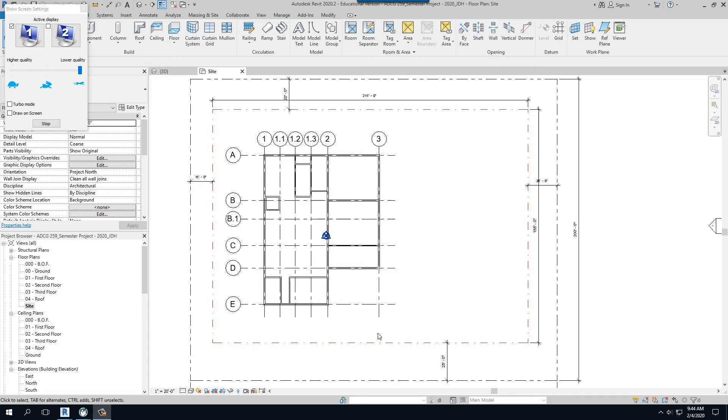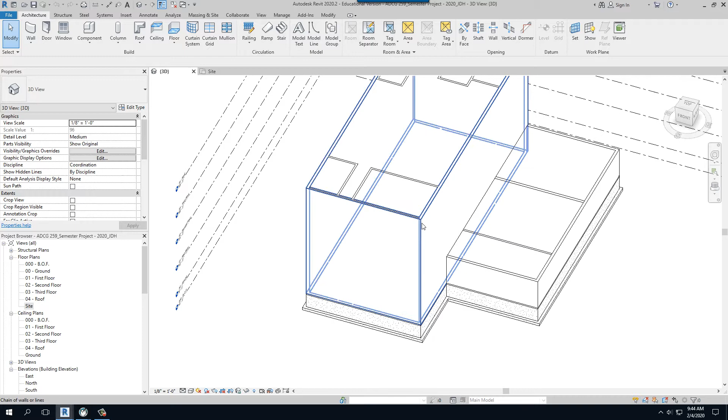Okay, so today in class we talked about masonry, and surprise, surprise, the building that we have is going to be a CMU building for the most part. Now you can see we have a lower area, we have a higher area, and what we're going to do with all of our exterior walls, we're going to change them into something that resembles our masonry units.

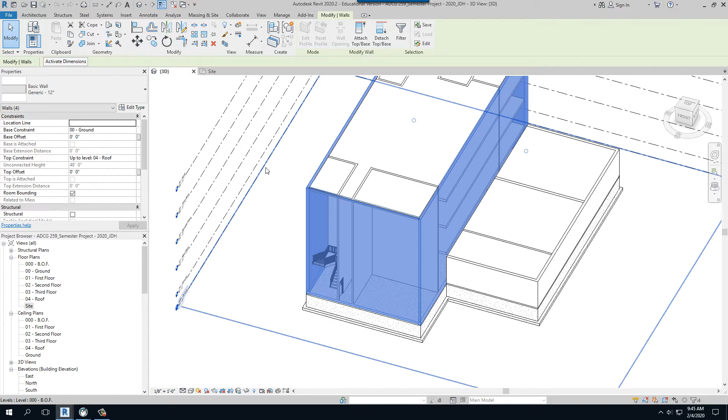Right now, though, these are just a generic 12-inch wall, where there's a lot that's going to change about this as we go forward, because it's not going to be a plain old block wall type of CMU like we saw. We're probably going to use more of a decorative or burnished, or perhaps in some areas a glazed unit as well. But we have to build these walls, and what we have to do is build a wall that will work. Okay, so how are we going to do that?

Let's just go to the first floor and not use our ceiling plans. So let's go here and let's just click on a wall. And once we click on it, when we go to edit type, what we can do now is either duplicate this wall, or we could turn this wall into one of the existing masonry walls that are out there, like brick on CMU or brick on metal stud.

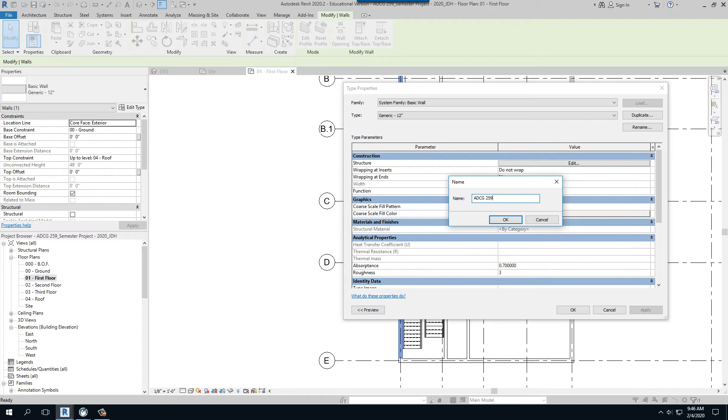However, that would be too easy. And none of these really match what we're going to do, okay? So what we're going to do is build our own. However, you can always piggyback from other walls too if you like, but I want you to get the experience of building it. So we're going to click on structure, right? But before we do that, we're going to duplicate, and we're going to call this ADCG 259 CMU. Right? That's why we know it's the one we built for this project. And we can rename it if we need to later.

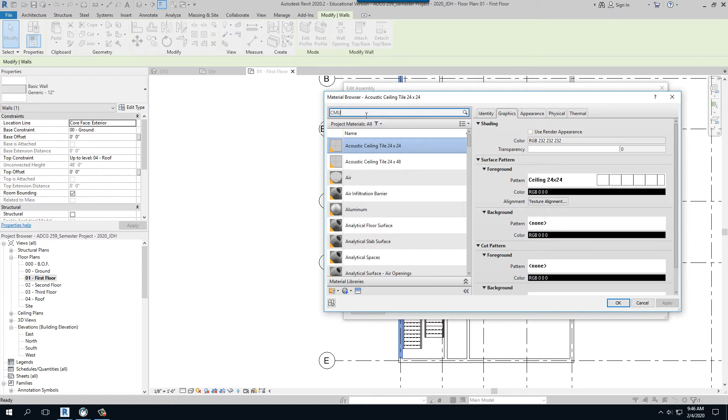So we're going to go in here right now and we're going to go into this category. And for the structural part of the category, right, we're going to click there. And hopefully we're going to bring up something that's going to resemble a CMU. Let's see if we can find something with CMU. All right, concrete masonry units. Good. So when we grab that, look how it gives us the pattern we need and the diagonal crosshatch we need, right? So right here, we're going to hit OK. And now that whole 12-inch unit is going to be what? Concrete masonry unit. I'm going to pause the video so we can talk about something.

So what we discussed is that in this wall, this thickness, it needs to be what? 7.625. Now, if I press enter right now, it's going to be all jacked up. So I have to put 0 space 7.625, okay? And then I can hit enter, and there's my 7 5/8. Now, I've got to do something, or else my wall's not going to be 12 anymore.

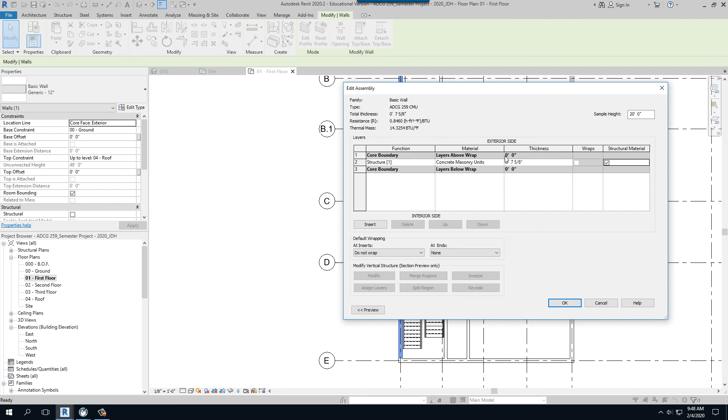So if I've got that CMU, where would I put that CMU in the construction if I wanted to show? It has to be up above. So there's going to be a different composition to this wall than maybe we thought. What's going to go behind the CMU, right? And those are the kinds of things that we have to think about, because if I just hit OK right now, look how much smaller that wall got. It doesn't match that 12 anymore.

Okay, so I'm going to go ahead and stop the video. I'm going to let you get caught up to me, and then we're going to continue to develop that wall. Okay.